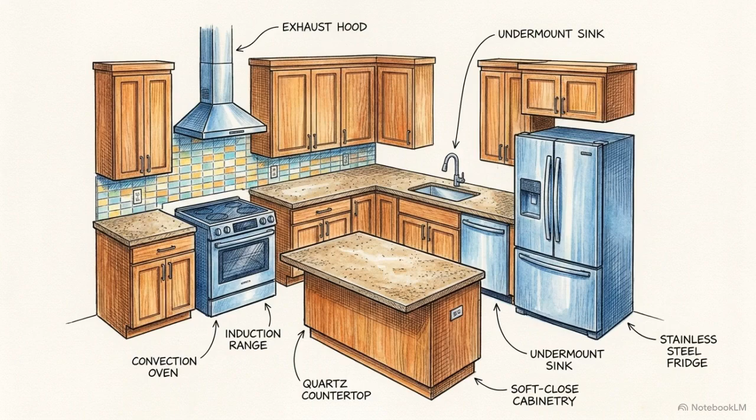Most of us walk into a newly built house, see the fresh paint, the shiny countertops, and assume it's a modern marvel of construction. We figure the builders use the best practices available. But the reality is very different.

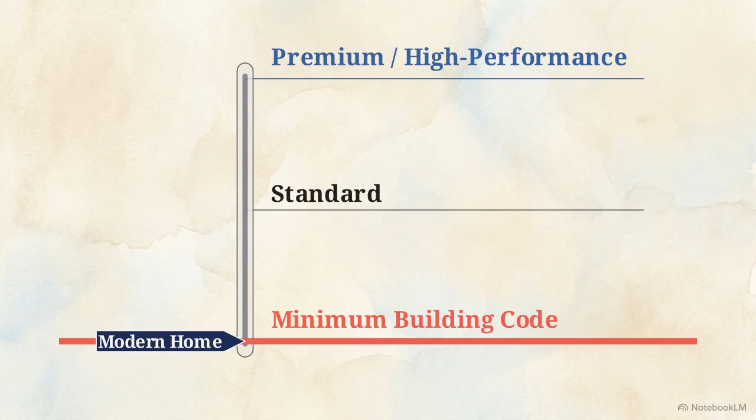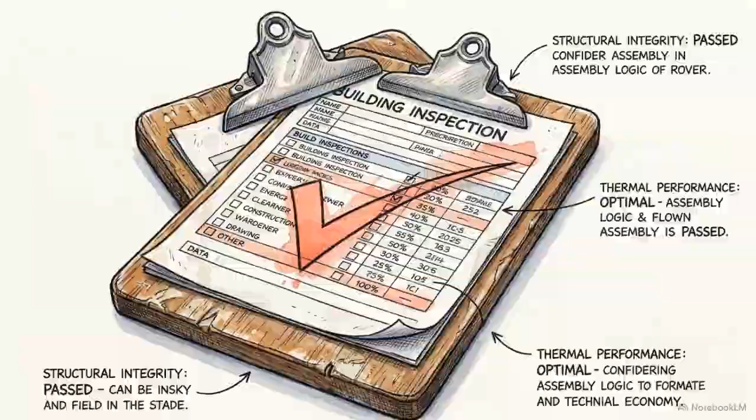This diagram shows a basic performance scale for construction. When a home is built to code, it isn't hitting premium or even standard marks. The needle drops all the way down, resting right on a red line at the bottom. That line is the lowest legal limit of safety and quality allowed by law. It's a structure designed simply to pass a basic inspection. That bare minimum standard is exactly why you end up dealing with rooms that are freezing in the winter and boiling in the summer.

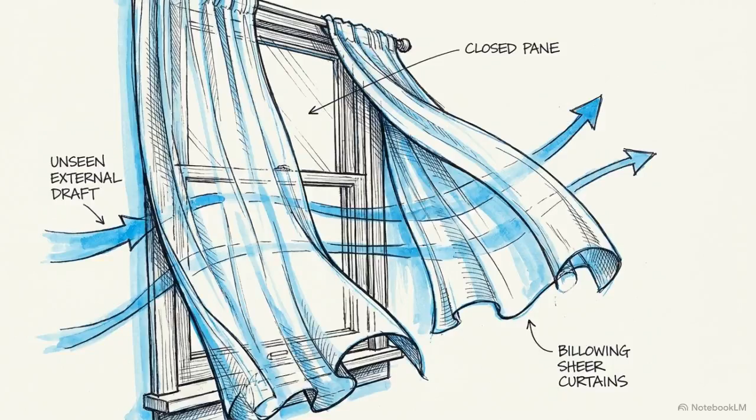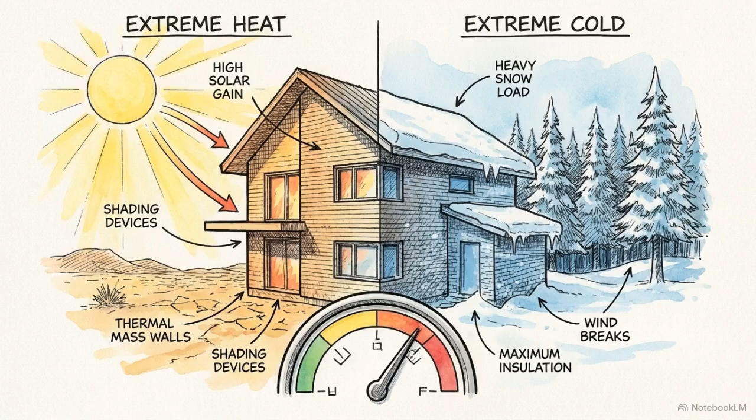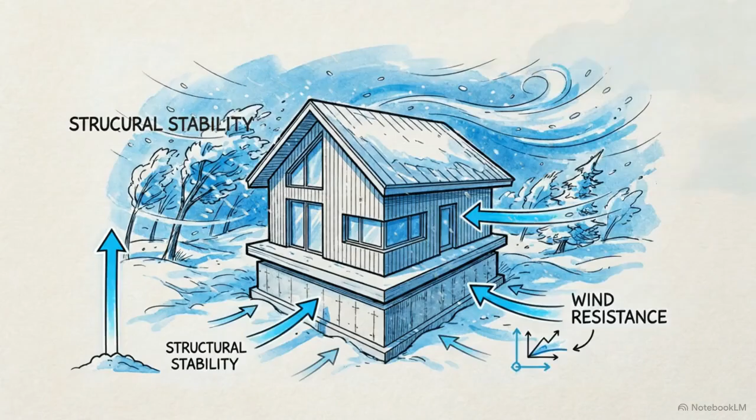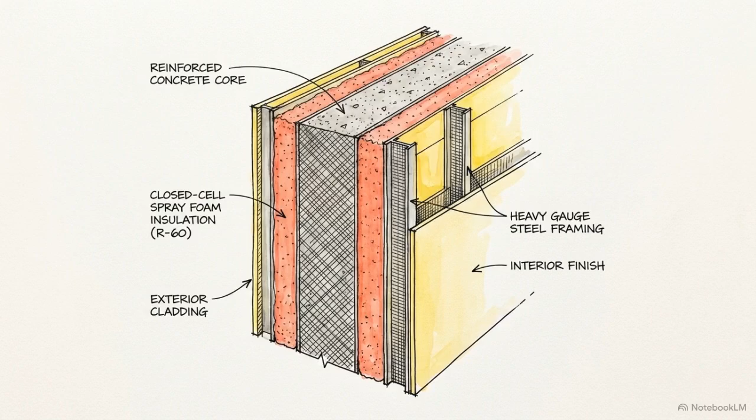It's the reason your utility bills spike unpredictably, and why you feel cold drafts creeping in around the windows. We are going to reject that industry obsession with slapping houses together as fast as possible. Instead, we are going to treat a home like a carefully engineered, tightly sealed machine. We have to design for the real world, because nature is punishing. The structures we build must stand strong against brutal summer heat waves and lock in warmth during deep freeze winters without breaking a sweat. That means our goal isn't to build to code. We are going to overbuild. We are creating a structure designed with such care and precision that it will easily last a century. To do this, we follow a few core rules.

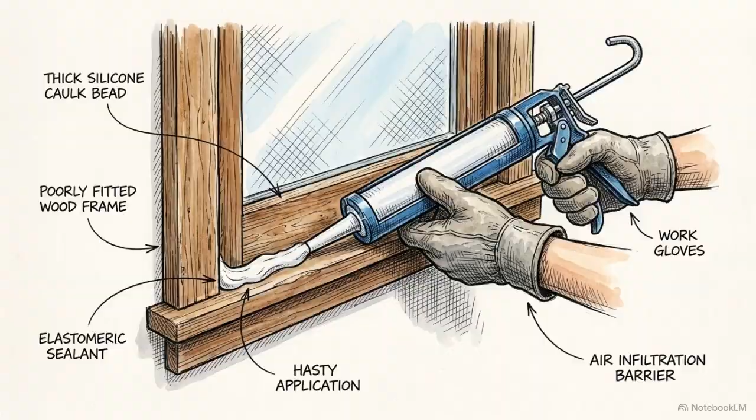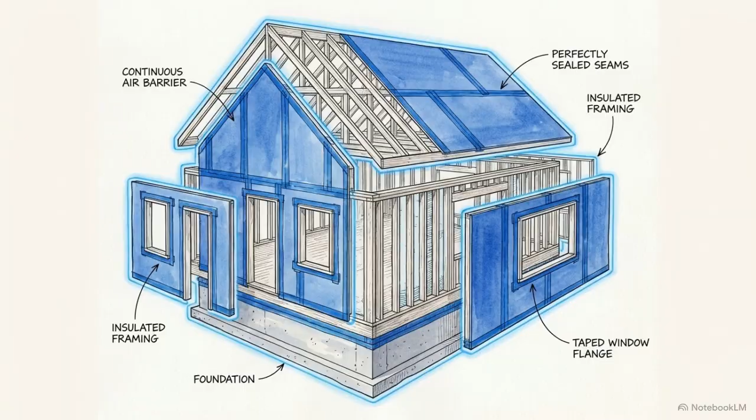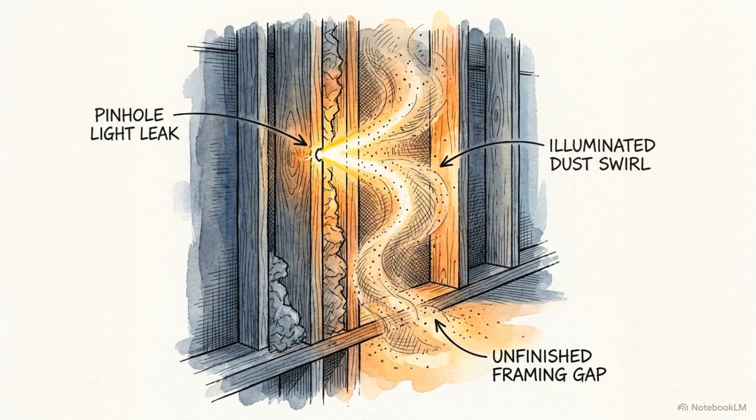That brings us to our second rule, creating a continuous boundary. This diagram illustrates a cross-section of our house. We want the home's protective layers, the thick insulation and the barriers that keep out wind and water, to act like a single, unbroken balloon tightly hugging the living space. And that balloon has to stretch flawlessly around everything. It runs all the way down below the dirt to wrap the bottom of the foundation, and it extends all the way up to seal the very peak of the roof. If you leave even a tiny gap in that boundary, the weather will find it. A single weak point compromises the entire thermal and weatherproof system, letting your expensive heat escape and allowing moisture to sneak inside.

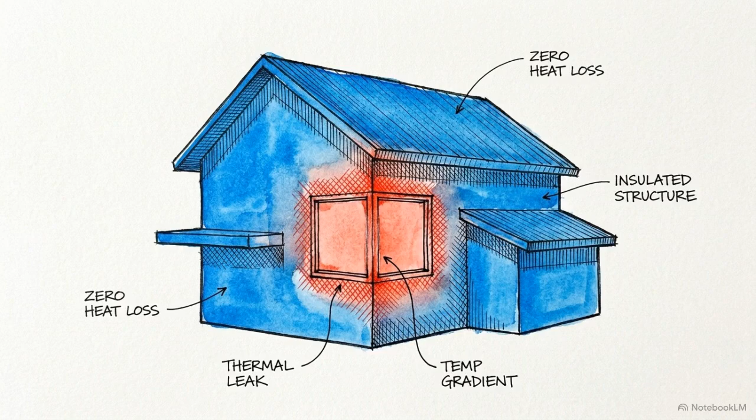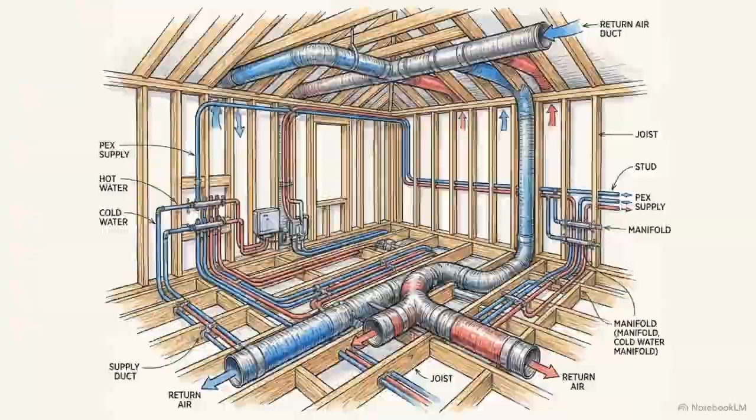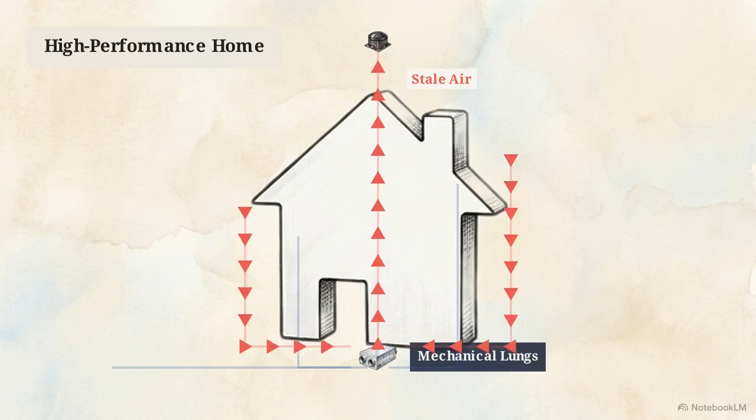Because everything is tied together, our third rule is that we must treat this tightly sealed house as a single interconnected machine. Think about it. If we make a house perfectly airtight so we never lose energy, we create a new problem. The home can no longer breathe through all those accidental gaps and cracks that old drafty houses have. This visualization shows the solution. The house needs mechanical lungs. We install engineered ventilation systems that constantly swap the air. It pulls out stale indoor air and carefully pushes fresh, filtered air from outside in, ensuring the indoor environment stays healthy.

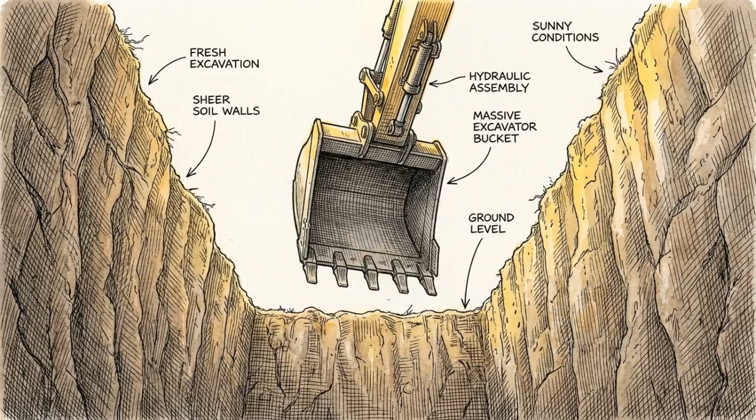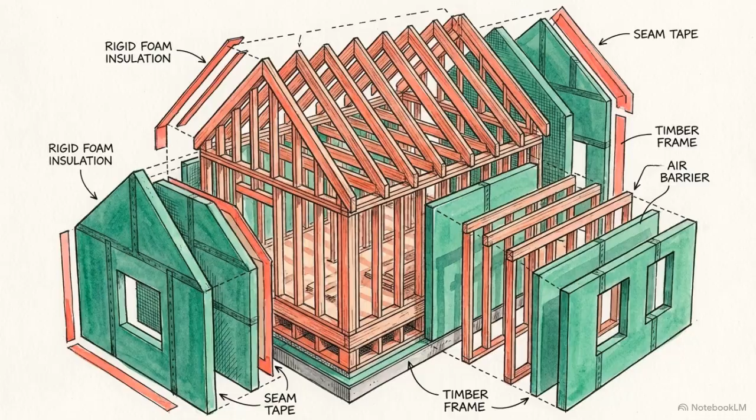So how do we put this machine together? We start deep in the earth, building a subsurface fortress that completely ignores freezing ground temperatures and blocks out soil moisture. Next, we erect the bones of the house. We build an armored structural skeleton and wrap it tightly in thick, continuous layers of insulation. Once the shell's secure, we run the home's vascular network. We route high-efficiency plumbing and airflow systems right through the protected center of the building.

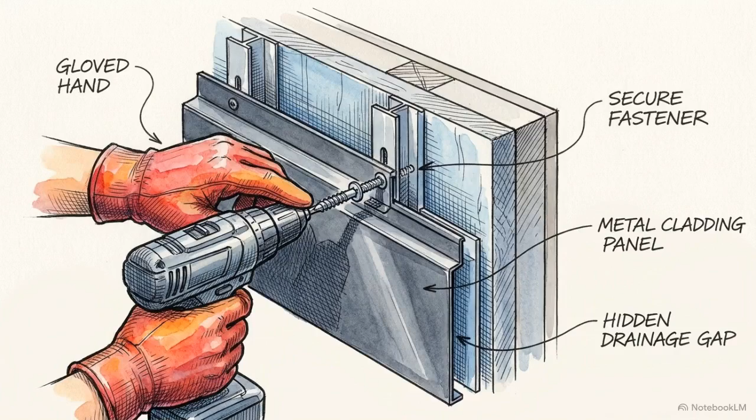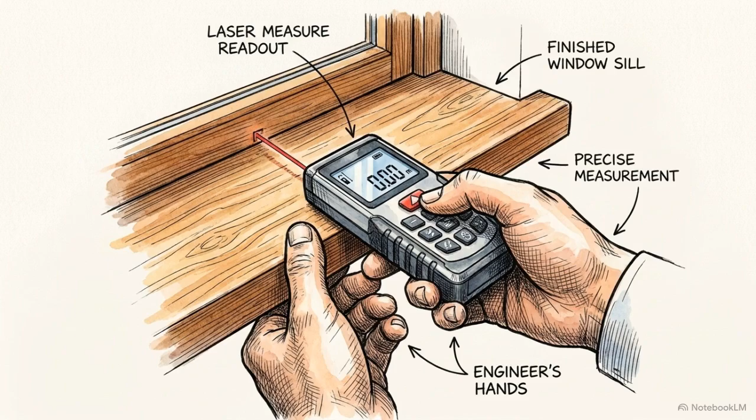Finally, we apply a strong exterior shield. This outer layer acts as an umbrella that aggressively sheds heavy snow, pouring rain, and fierce winds before they touch our airtight balloon. Because the house is one giant machine, altering any single part of that anatomy sets off a chain reaction across the entire structure. That is why every layer requires absolute precision from the very start.

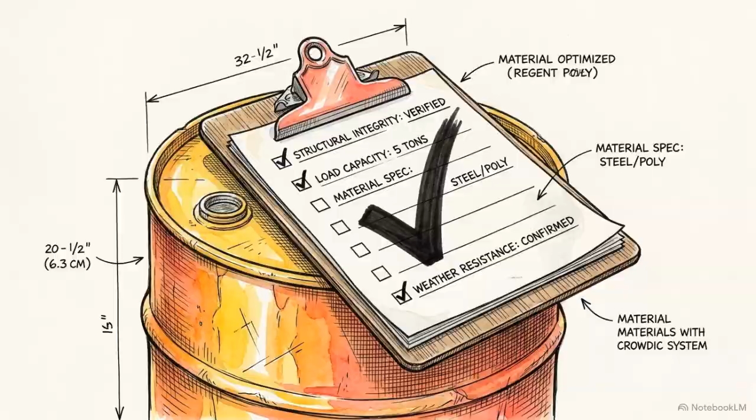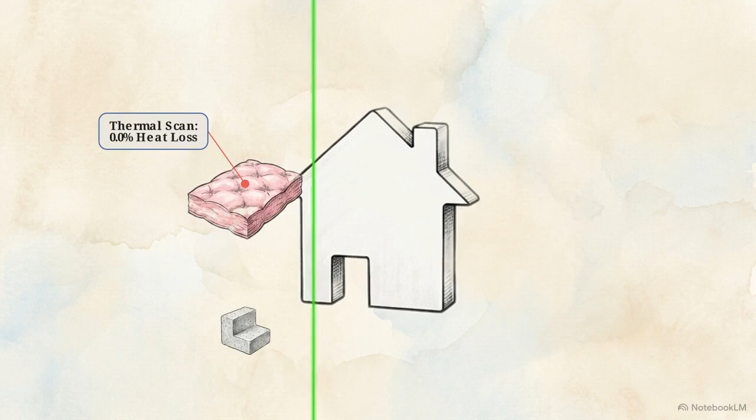This brings us to the final and perhaps most important rule of our building process: trust, but verify. When you are building a home like this, you do not simply nod and accept a contractor's word that a job was done correctly. Instead, we use applied math and physics to absolutely prove the house performs exactly the way we designed it to. We demand hard evidence before the final check is written.

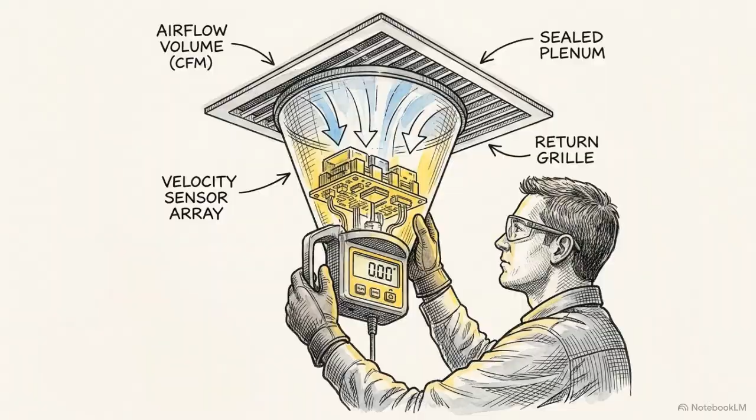To get that proof, we use specific scientific tools. We pressurize the house with massive fans to check for tiny air leaks. We use airflow hoods to measure the ventilation. And as you can see in this thermal image, special cameras used in the dead of winter guarantee absolutely zero heat escapes through the walls.

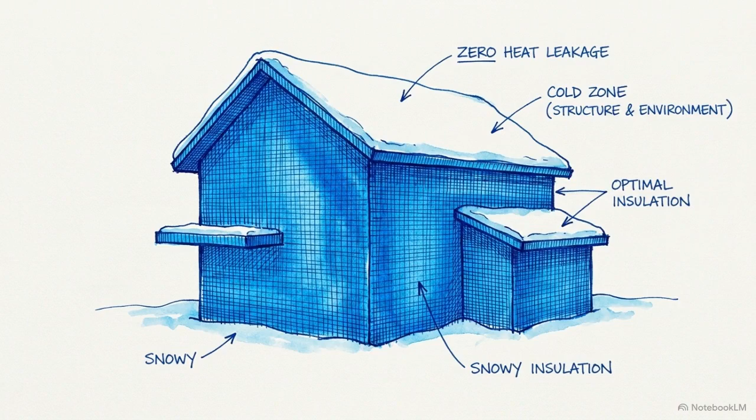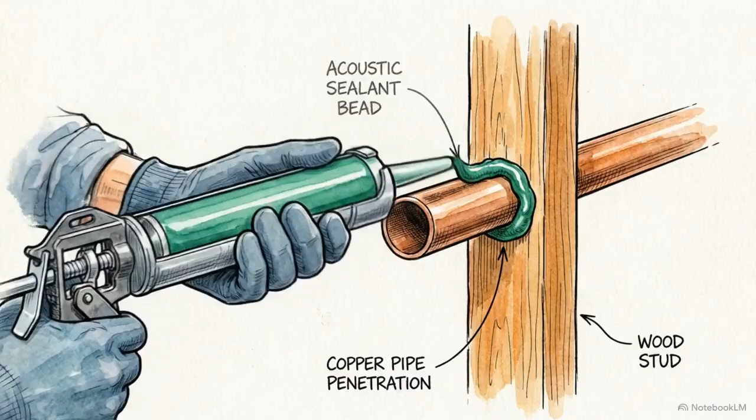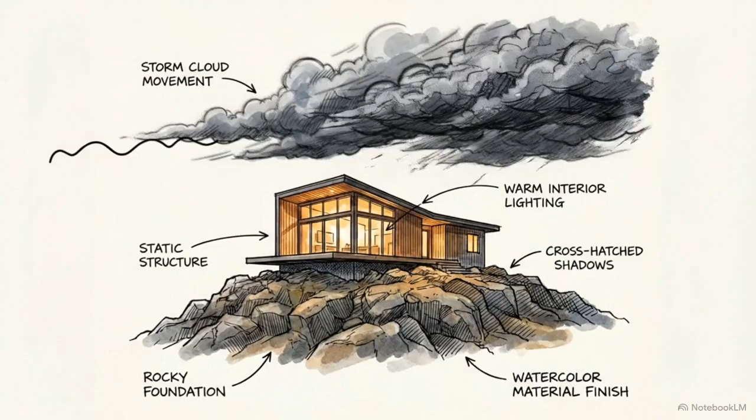Achieving this level of quality requires a major shift in how you think. You have to care deeply about the tiny hidden details that will eventually be completely covered up by drywall. An overbuilt home is an investment in legacy engineering. It is a protective, highly resilient machine meant to safely shelter a family for generations.